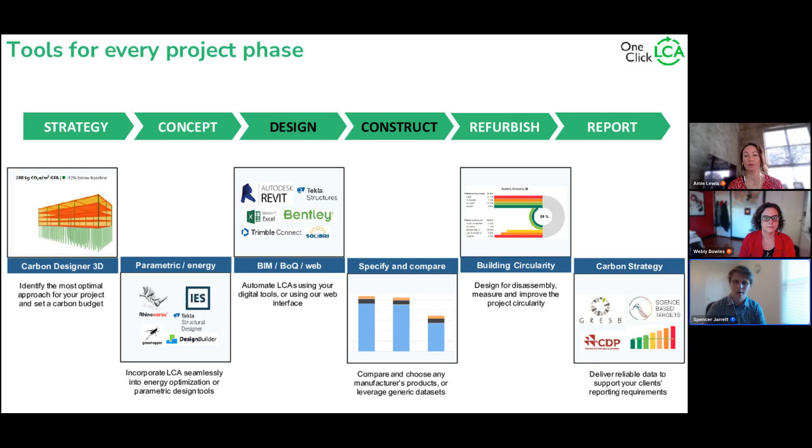So we do this by creating tools that help you first measure your impact and then actually see what that is. And then we have tools in place that allow you to compare different materials, different design options, different manufacturers, different plants to find reductions for each project.

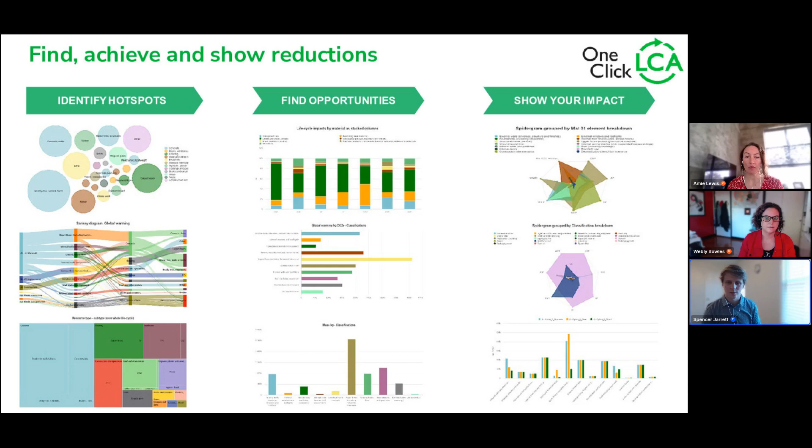So to get a little bit more specific with some of the tools that we offer, the first one being Carbon Designer 3D. So this is our conceptual modeling tool. Basically, in just a couple of minutes, you can come up with sort of a shoebox building model based on the square footage, the number of floors and the overall dimensions of your proposed project.

And from there, you can change out materials and different construction types based on US industry average EPDs to compare design options very early on before you ever have to actually draw or model anything or invest too much time into the design of the project.

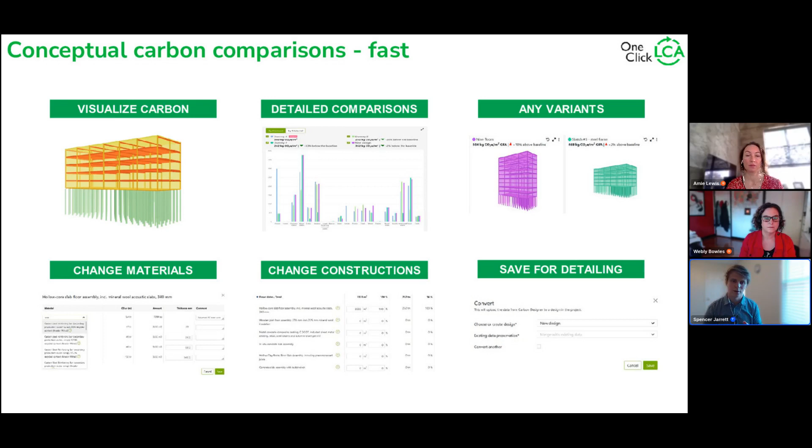One of the most common ways that people come up with a baseline LCA using One Click LCA is just using a simple, common Excel-based material takeoff or bill of materials. So in short, we need to know the classification of the materials you intend to use, the material name, ideally as specific as possible, and then the quantity of those materials. If you have that in a spreadsheet, you can upload that directly into One Click LCA, and it will automatically map those materials to EPDs. And then from there, you can refine the selection of EPDs to match what you actually intend to use on the project.

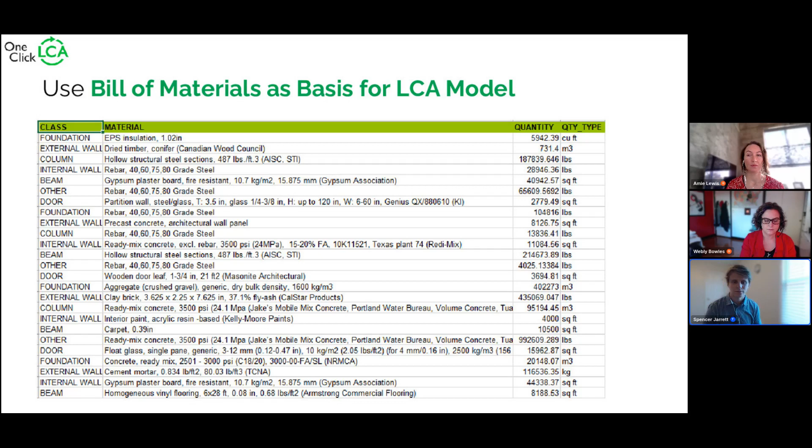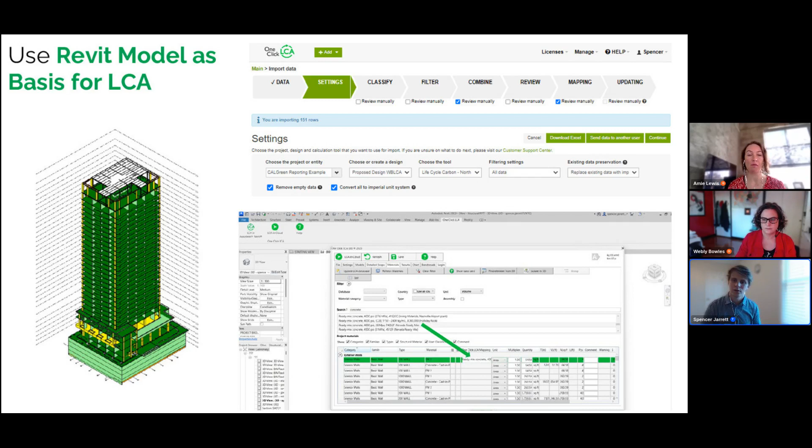The other option is to stay within Revit, and you can actually search our EPD database, which in North America, we have roughly 50,000 different EPDs that you can search for and use in your LCA designs. You can actually search that entire database within Revit using the One Click LCA plugin and individually map each material to the EPD that you intend to use.

And you really have control over the level of detail that you'd like to have within your LCA. So there in the screenshot on the top right, it's showing the options that you have as far as choosing your default LCA parameters. These are things like the typical service life of materials, the end of life calculation scenario, where the project is localized to. You can set blanket parameters. So if you don't change the parameters for every single material, it will default to whatever you want it to default to.

So in practice, the way that our tools are usually used are to identify, first off, what the most impactful materials are. So as soon as you come up with a baseline LCA, whether it be from an Excel bill of materials or a Revit BIM model, and you input that into One Click LCA, we can quickly tell you what are the most impactful materials. From there, you can compare different sustainable alternatives.

You can do this by comparing different plants from the same manufacturer if they have EPDs, different materials from differing manufacturers if they have EPDs. And this is a really practical way that allows you to make better decisions on where to source materials from and what materials to use in the first place.

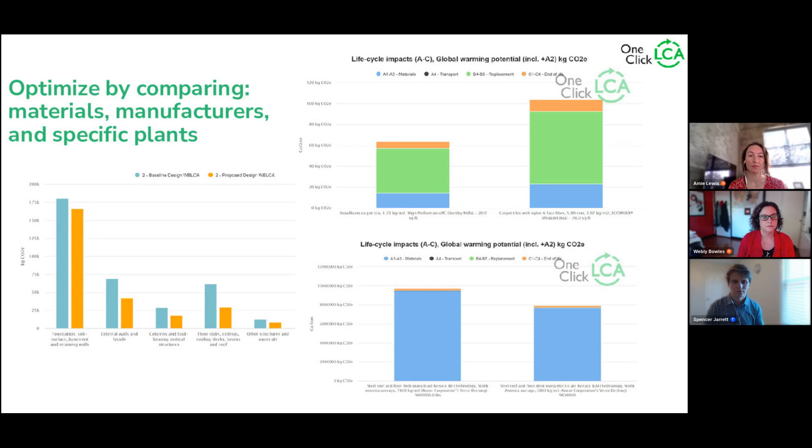Some other options that we have are you can download the entire LCA result report as an Excel file and then upload it into Power BI or Tableau if you want to have it on a separate dashboard. And in terms of actually documenting the EPDs that you are using, rather than having to go and download each EPD from our database or from different program operators, you can, in one click, put all the EPDs into one zipped file, and all your documentation is in one place.

So that's just a bit about how we can actually help you comply with the upcoming CALGreen requirements. At this point, I'm going to pass it off to Webly, and she will kick it off in some more detail for those requirements.

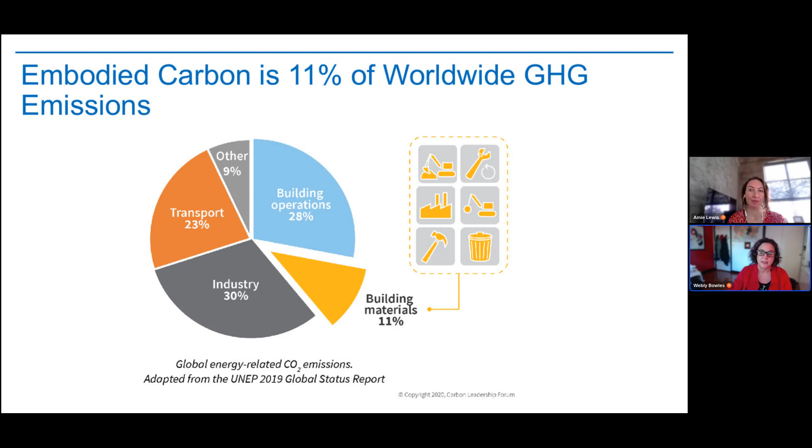I think everyone was probably familiar that buildings are responsible for 39% of global CO2 emissions, and about 1/3 of those actually come from the production of building products. So operational carbon occurs year over year as the building consumes energy, and it's often flexible because we can reduce that. We can get low carbon energy through renewables and other such things, whereas embodied carbon is pretty much fixed when the products are installed in the building. And we can have a separate conversation about carbon storing materials later.

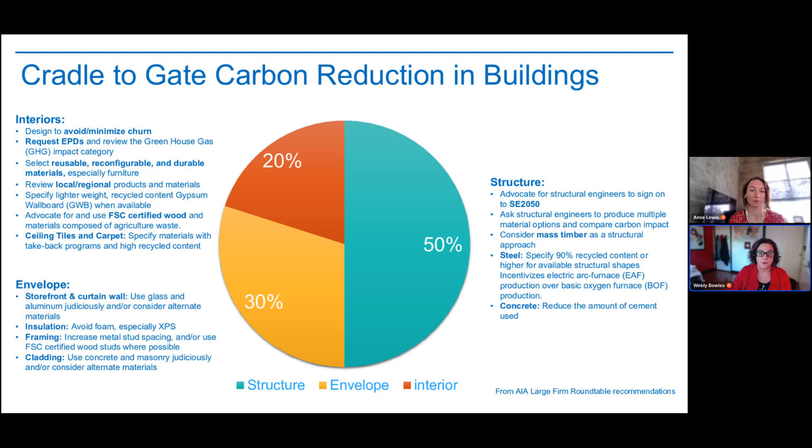The national and local building codes can impact buildings' embodied carbon through building or zoning codes, and even design standards really impact the materials that we use within our buildings. Utilities that regulate GHG emissions and not just energy, kWh, and therms, they can also provide incentives for low embodied carbon activities as well. And AIA, ASHRAE, university certification bodies can require curriculum and education on understanding the life cycle emissions. And that's pretty similar to what California's AB 1010 has done, where it requires architects to get net zero carbon continuing education. So there's a lot of opportunities that we can impact.

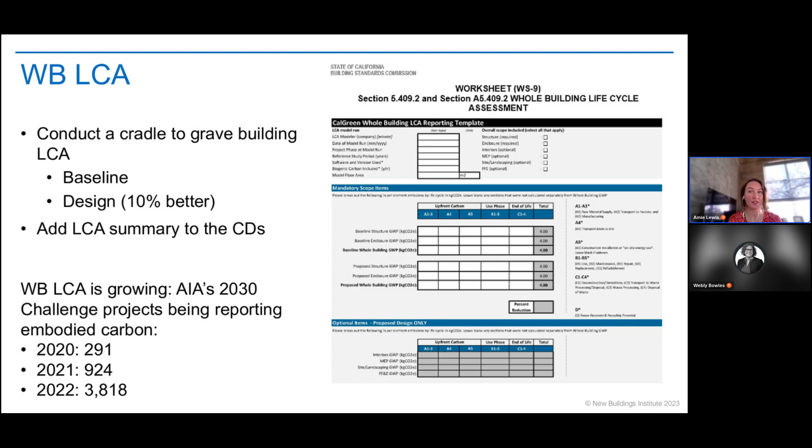This is a design-based credit and requires the design team to set up their contractor to install as intended. In the way that CALGreen doesn't require the energy model to match exactly the operational energy of the building once it's occupied, the same is true for embodied carbon, but there are several existing processes that set the construction process up for success. For specifications, include reporting requirements in Division 1, including the EPDs for key products like concrete, steel, insulation, glass, and so on.

Insert the LCA worksheet in the plan set. In RFPs, highlight the embodied carbon reporting needs. In bid meetings, stress the importance of meeting the embodied carbon requirements. Inquire about how contractors that you are considering working with have met requirements on similar projects or how they plan to on your project.

Projects of this size will have more construction administration than smaller jobs, which is an advantage for confirming compliance here. Submittal requirements are essential verification points to confirm that the products included meet the GWP requirements as specified. And if products are changed, consider updating the LCA and providing that information to the owner.

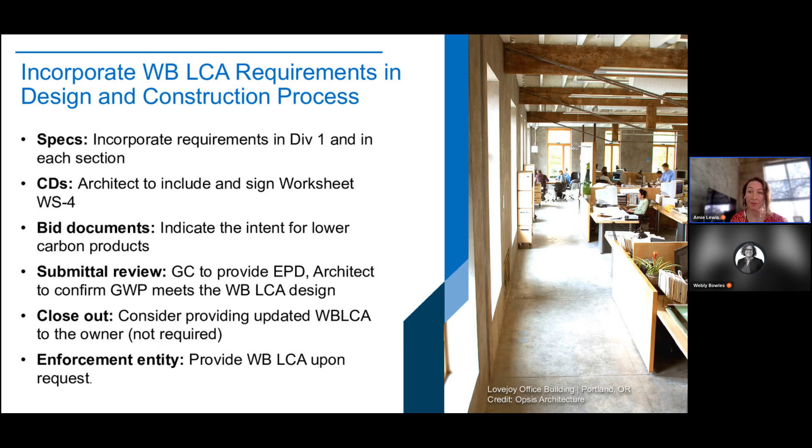For the building reuse compliance path, the elements to include for reuse include primary structural elements, enclosure, roof and wall framing, insulation, and exterior finishes. It excludes windows, portions that are structurally unsound or hazardous, and hazardous materials that are being remediated. And there is an exception for additions that are more than 2 times the area of the existing building. Those portions will be considered new construction.

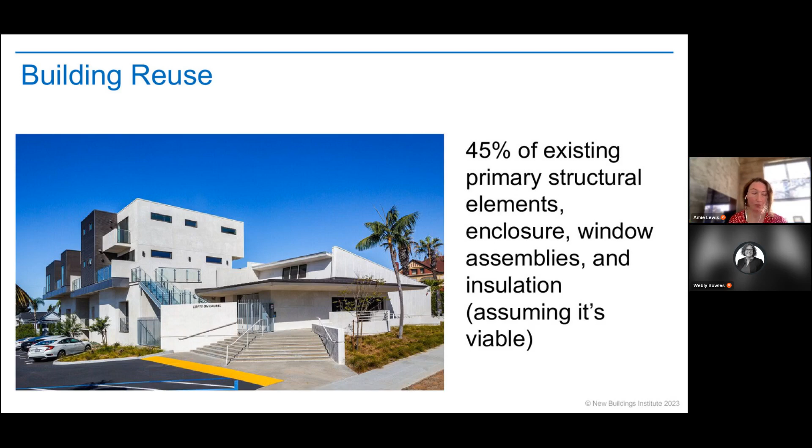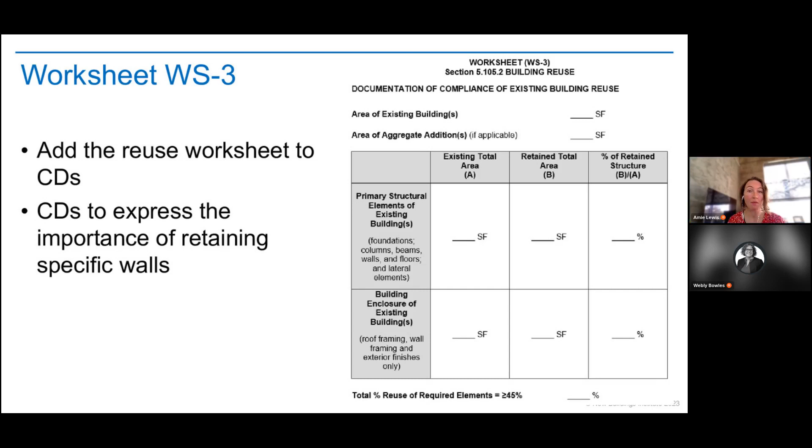When calculating the reused area, there's a worksheet to indicate the amount of reuse of the structure and enclosure. Similar to the whole building LCA, building reuse is of course a design-related measure, so the same process should be followed to incorporate the requirements into the contract documents, meetings, and other communications.

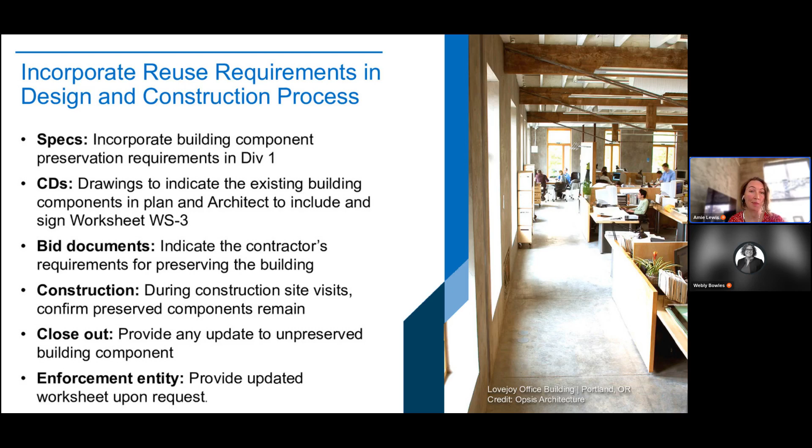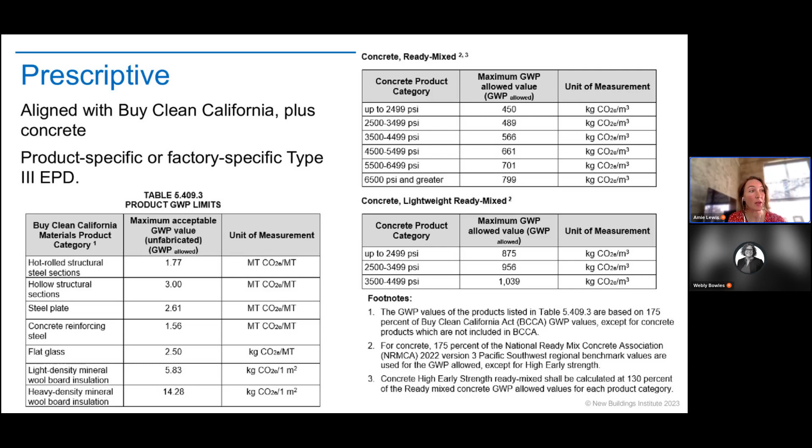The prescriptive compliance path aligns with Buy Clean California, the government's procurement policy, with the important addition of concrete. This approach requires that specific products are at or below specified global warming potential limits. These limits are set to begin with at an achievable level above industry average. To comply with the requirements, the project teams must collect and report Type 3 environmental product declarations, either product-specific or factory-specific.

Concrete is a unique product. Each mix of concrete doesn't have to meet each GWP limit, but the contractor can apply a weighted average approach on average of all the mixes used in the job, and the weighted average must meet the GWP limit. And this process is what's used in the Marin County Low Carbon Concrete Code.

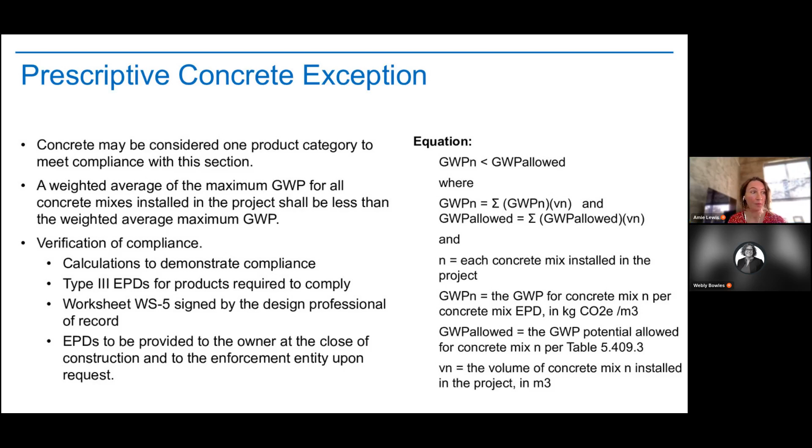The design professional will need to sign the worksheet confirming compliance. Since this is a construction-related measure, the architect will need to work closely with the construction team to confirm compliance. Similar to the other measures, setting up the process in design will help ensure proper installation of low-embodied concrete products.

We've covered a lot of information, and I'd like to help you look ahead to what your local building departments will be looking for to verify compliance. The documentation we've discussed should be verified and reviewed in plan review and field inspection. Include the CALGreen worksheets in your plan sets. The whole building LCA reporting is required to be produced with a qualifying software, as mentioned earlier.

And remember that although in the plan sets for the mandatory measure it's required just to include the summary analysis and the signature worksheet, the enforcing agency may require reports. And that parallels other areas of CALGreen where you need to be prepared to show additional documentation. So be prepared to furnish the report. And for compliance with these measures, it's best to hit it hard early in the process, pay attention early in design in order to have as much supporting documentation in plan review and in field inspection.

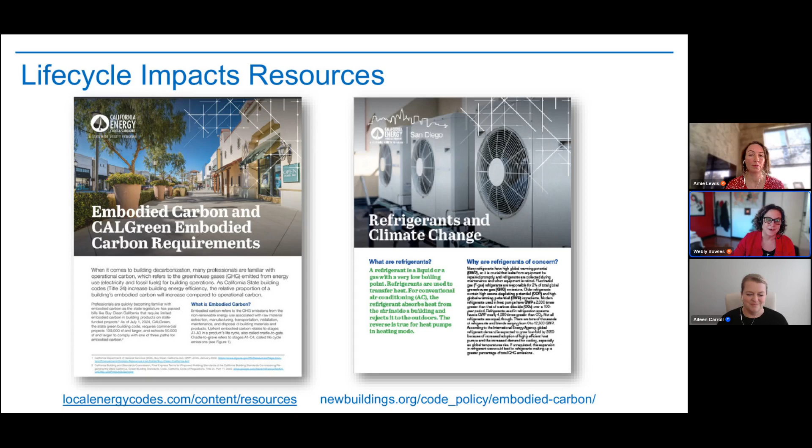This is the soapbox I stand on every time I talk about embodied carbon: while refrigerants are not required within CALGreen, it's always really important that we consider some of the highest carbon products in our buildings, including refrigerants. I always have to make a plug to talk about refrigerants, and California has some really great policies around managing refrigerants and creating secondary markets.

NBI also has a bunch of resources. If you want to nerd out and talk about embodied carbon in the code, you can go to our embodied carbon landing page on our website and read more about that. You can also get in touch with both of us, and we're happy to help answer any questions.

We are passing along questions that we've been collecting as we've been talking about this for the last year, supporting the state in developing an official FAQ, and I can't tell you the timeline as to when that will be published.

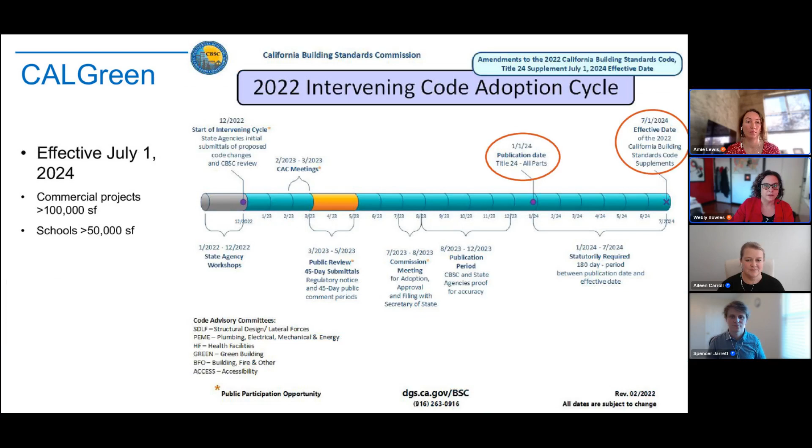When we look at the three different paths, specifically the LCA and the prescriptive path—the prescriptive path is specifically structural steel, so all your structural steel shapes, various shapes, rebar, flat glass. Not necessarily glazing, but flat glass independently because of how the product category rules are written. Also light and heavy density mineral wool insulation—only that type of insulation—and ready mix concrete.

Excluded from here are any insulations that are not mineral wool insulation, as well as any precast concrete or light frame steel decking—that's all excluded. These products are specifically mentioned because there are product category rules which govern the industry-wide EPD for those products, so those are very prescriptive for the prescriptive path.